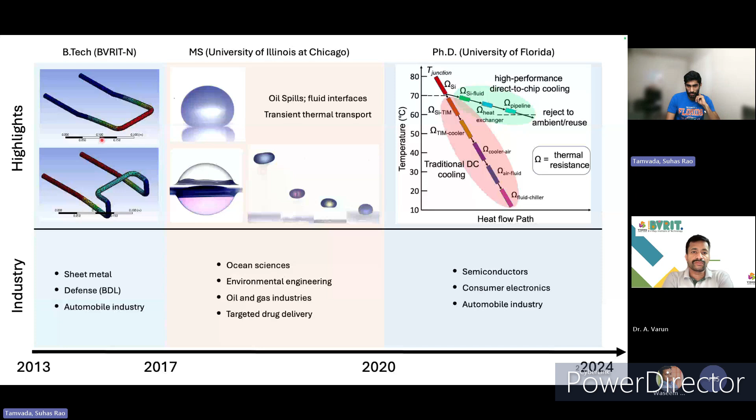Then I moved on to get my master's at University of Illinois Chicago, and I was really interested in fluid dynamics at that point in time.

I started taking one or two fluid courses, and what really interested me was the fundamental research going on there. What you see here is not a simulation; it's an actual oil drop sitting on top of a liquid surface.

If I play this again, essentially what's happening is when the oil drop is coalescing with the liquid surface, it's not happening in one step. It's taking multiple steps to coalesce with the surface because of capillary forces. The capillary surface tension forces acting on that oil drop are pinching away a certain volume of the drop. This is exactly what happens in oil spills.

Why is that relevant? Let's say you have an oil spill—I'll talk about this in more detail again. Most of the relevance for the research I did during my master's was related to ocean sciences and environmental engineering. ExxonMobil was very interested in the research I was doing, and I'll tell you a nice story about that. Beyond that, the pharmaceutical industry was also interested, since there's a lot of relevance to oil-water interactions in emulsions.

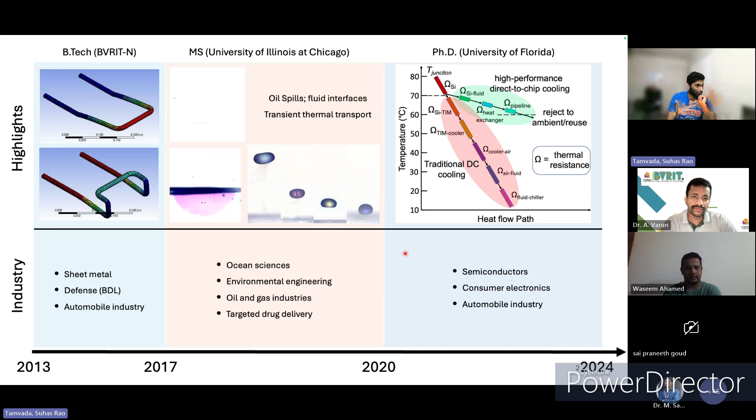Oh, that's a cool video I took. It's essentially a mix of an air bubble on top and a little bit of oil on bottom that's sort of bursting, and that became our icon for everything.

Anyway, like I was saying, a lot of internships and everything during BTech. This is a cool picture that I found from 2016.

No points for guessing who the driver was at that point in time on the go-kart. Very stylish driver, but we built our own go-kart. I think you might be, in certain teams.

The SAE Baja team is a very nice team to be on. I think this was a Greek name that we chose, basically a horse that was, if I'm not wrong, Alexander the Great's horse. I'm not too sure, but anyway - Alexander's horse, right? You're right, that was Alexander's horse's name. Yes, absolutely, so I remember we chose the name based on that. It was then, Bucephalus, I think. Yeah, that's exactly right. So that was a very nice experience for me.

Again, we built this from scratch. So think about everything that needs to go into this - we had to design our own things. I think at the end of it, at least two or three of us basically became experts in welding, because we could not weld at the start, but then we practiced and practiced and definitely became experts at welding these things, all the chassis components and all of that.

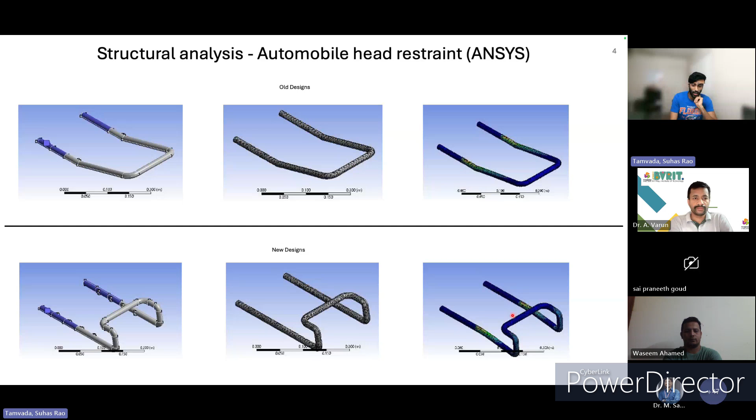So many industries have worked on this. And of course, I have some really outgoing memories from 2017. I think Murli Krishna sir, he was our class teacher at that point in time, and also head of department. We got some cake and printed out some T-shirts with all of our faces on there. For some reason I couldn't find a lot of other pictures, or maybe I was slightly lazy to go back to Google Photos, but definitely a lot of good memories, fond memories.

And then I started my master's at University of Illinois, Chicago. Somehow I was working with a team where there were a lot of Indians. This is Varun, he was a postdoc when I was there. He's now at Harvard, pursuing an academic career himself.

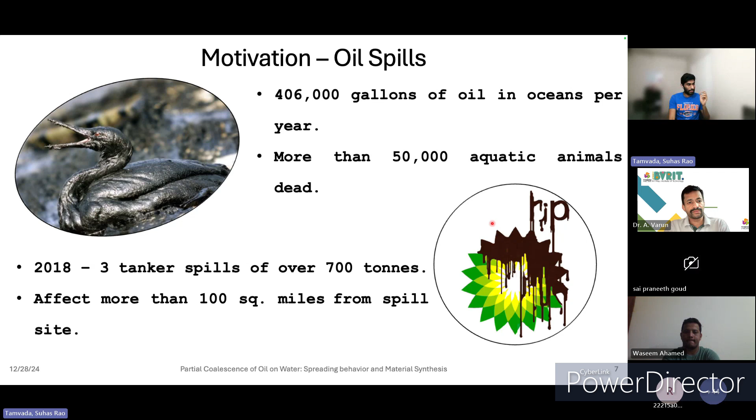The reason I wanted to put up this slide and the next one is to show you that as mechanical engineers, we are needed in many more fields than we think. Initially when I was doing my BTech, the reason I wanted to take up mechanical was I was interested in automobiles. I loved cars, things like that. I remember there were these Meccano or Lego sets that you used to build small equipment from - that's what I was interested in as a child. A little bit of aerospace too, but those are not the only fields.

Here's a story I promised I'd tell you: when the BP oil spill happened, mechanical engineers from Purdue were specially contracted by the US government and a national lab here called Sandia National Labs. They flew down immediately, assessed what was happening inside this oil spill, and mechanical engineers solved this problem, not anyone else. So mechanical engineers are needed in many more fields than you think.

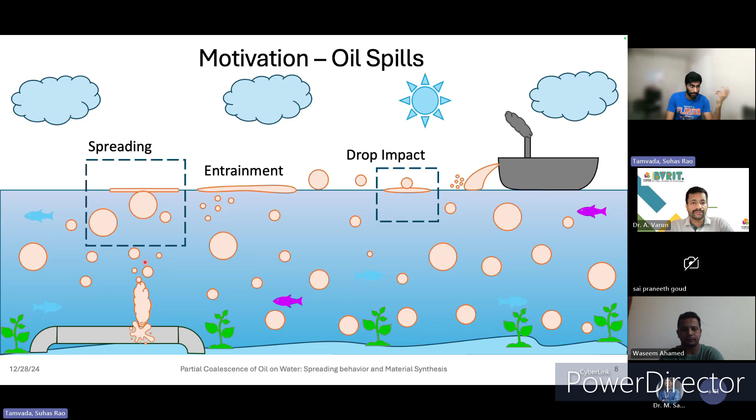So here what I was showing was if there's a tanker going, there could be oil spilled here, or if there's a pipeline burst somewhere under the ocean, that's also spilling. Essentially we were studying all of these processes, and what we wanted to study was how these oils actually spread on ocean surfaces. That tells us if these oils are spreading at a certain rate, then how can we employ mitigation strategies to solve and clean up these oil spills.

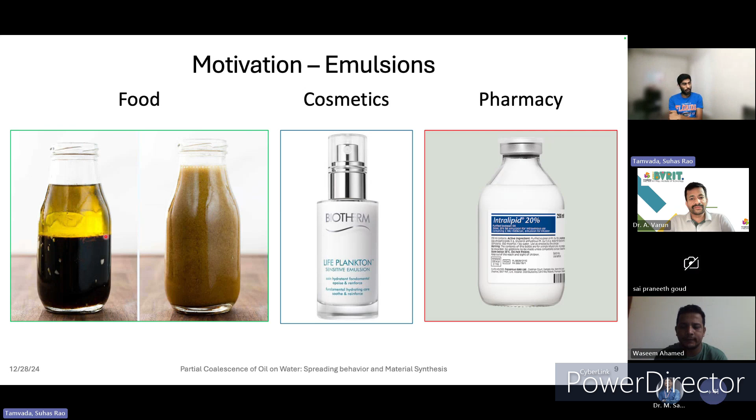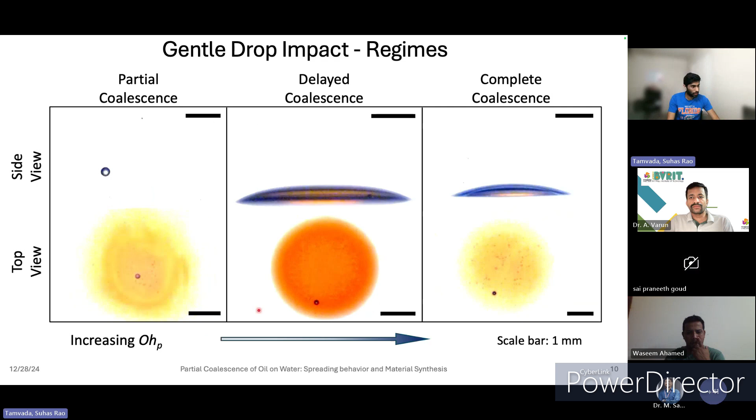These experiments are essentially governed by something called the Ohnesorge number. I don't want to get into too many details, but there are fundamental fluid dynamics numbers that govern these processes. We were studying how they spread, and we came up with these spreading laws based on experimental data points.

So I was studying this: there's an oil that spreads to a maximum, then recoils and comes back, and there's another oil that just spreads to a maximum diameter normally.

One thing that was really interesting for us as mechanical engineers—I kept thinking, how can I relate this back to fundamental mechanical engineering that we studied? What this looks like is essentially a spring mass damper model. The oil drop spreads very similar to a spring mass damper system: the mass of the drop is the mass of the weight you're using, the surface tension of the drop acts as the spring, pulling it back, and the viscosity acts as a damper.

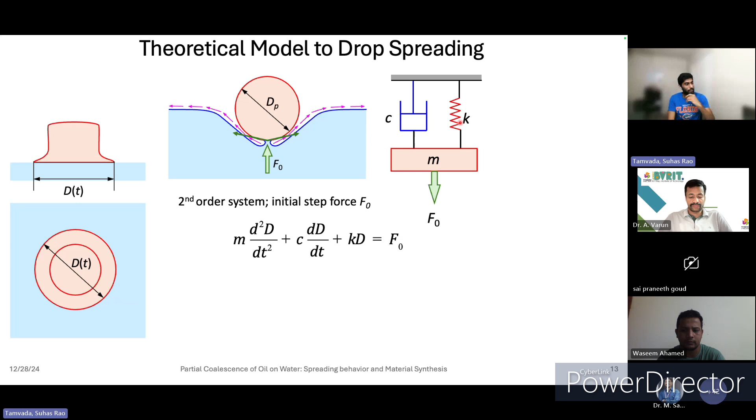You can use fundamental differential equations to model these—I won't go into details. I'll skip some of these slides from my thesis presentation, but we see that you can actually model all these oil spills as if they were spring mass damper models.

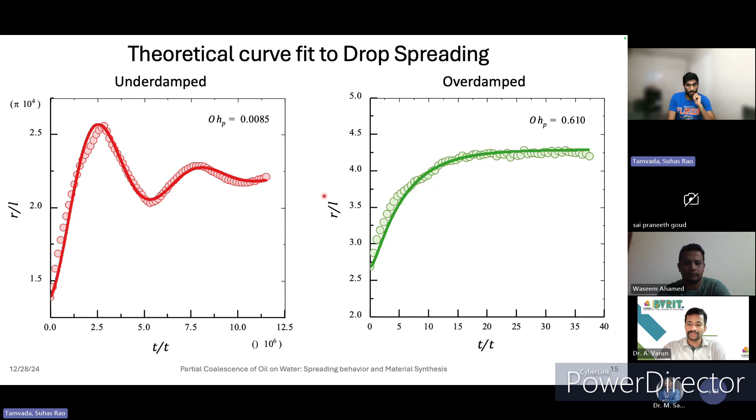My whole idea in showing all of this is that I never knew before joining this lab and working on these experiments that ocean engineering and environmental science actually require mechanical engineers on such intensive projects, where we have to go and solve these problems for a lot of industries.

I defended my thesis under my advisor, Professor Sushant Anand, and then switched gears to study a lot of heat transfer at the University of Florida. This was our lab again—it looks a little messy, but this was one of my experimental setups. I worked on quite a few projects there.

The other thing my PhD at University of Florida gave me was this: if you take any of your phones right now, they're completely filled with a lot of chipsets. How are these chipsets actually made? Companies like Apple, Samsung, or Google design these chipsets and send them out to something called foundries—companies like Global Foundries, or Taiwan Semiconductor Manufacturing.

Yeah, I think you're muted, Dr. Varun.

But basically TSMC and all these companies start manufacturing these chips, and I got to do all those processes inside the clean room—that's why I'm wearing all these suits, almost like wearing PPE kits during the pandemic. We have to do that because we cannot let even a small strand of hair affect the manufacturing process. So I was building these chipsets, and then performing thermal analysis on all of them.

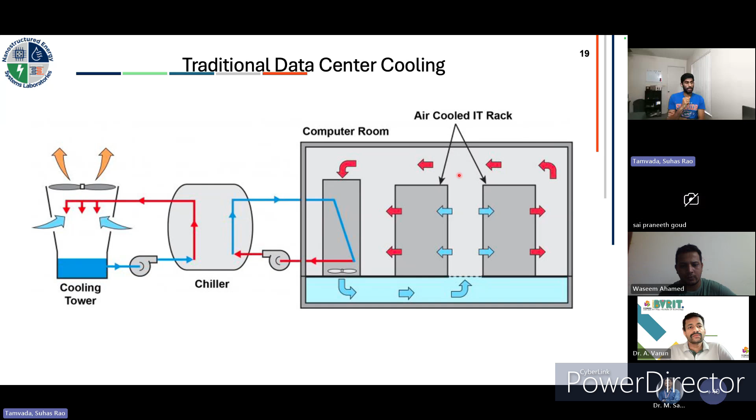And roughly, think about this. This is my favorite chart that I always use to pitch to investors and everyone. Roughly 50% of the energy flowing into a data center is used not to power the chips, but actually to keep the chips cool. So imagine how much opportunity we have as mechanical engineers to go and reduce this. Our goal essentially is to reduce it to roughly 2% of the entire energy usage inside a data center.

That gives a different kind of opportunity. I want to talk about research opportunities, but one thing I wanted to mention here was that through this entire process, I've also been exposed to a lot of entrepreneurial skills and opportunities. The technology I developed during my PhD, investors were actually interested in, and we had, and I think we still have, the opportunity to commercialize this technology and build our own startup.

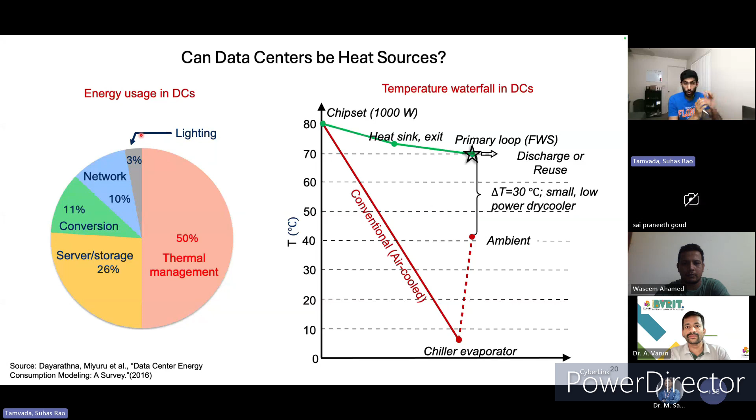So, how many of you want to start your own company, maybe after BTech or maybe after a little bit more formal training? Do you want to raise your hands? Or maybe some of you are already doing it on the side. Yeah, this is all great. At least 2 or 3 people. Okay, that's nice. 5 actually.

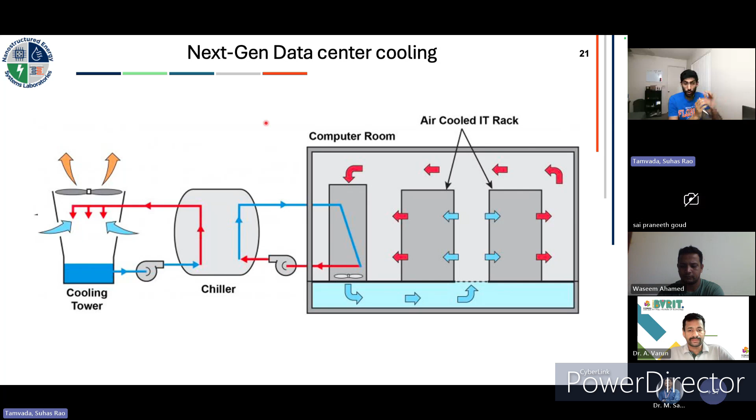Okay, that's good. This is great, because for me, this kind of exposure to pursue different paths is valuable. At this point in time, I could have chosen to become a professor and teach all these things. If that's what you're interested in, that's what you can choose. If you want to go into industry, you can choose that. Or if you want to start something of your own, if that's what really excites you, building products on your own is something you can pursue as well.

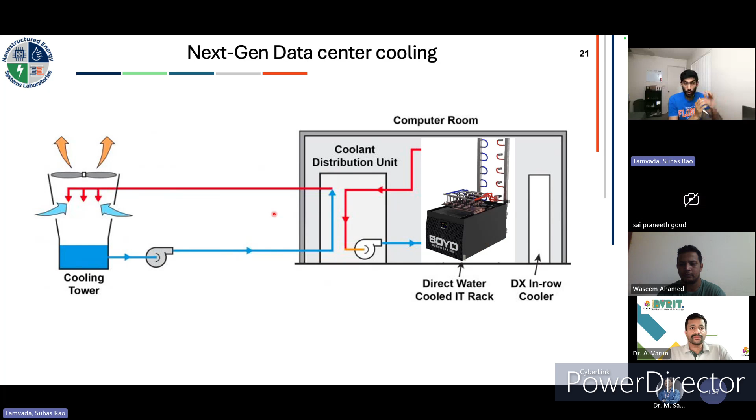What I was showing here was essentially that there are all these chiller units that can be eliminated if we essentially use liquid cooling inside these data centers. This is something you'll probably keep hearing about very soon. I don't want to go into all the technical details, but basically, a lot of mechanical engineering here as well, and biomedical engineering as well.

So can anybody point out one case of liquid cooling that you see in everyday life? One of the most powerful computers is actually liquid cooled without being air cooled. Does anybody want to take a guess at what it might be?

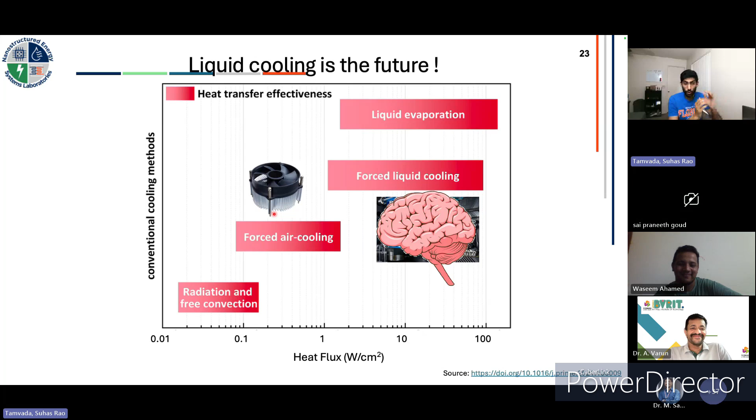So it's actually your brain. Your brain is doing millions and millions of computations, neurons and synapses every second, and essentially it's as good as or actually twice or thrice as powerful as an NVIDIA GPU, for example. But you're not putting huge amounts of fans or anything to cool it. You're just using your blood circulation to essentially cool it, and all that heat is being taken away through sweat and liquid evaporation. These are all cool things.

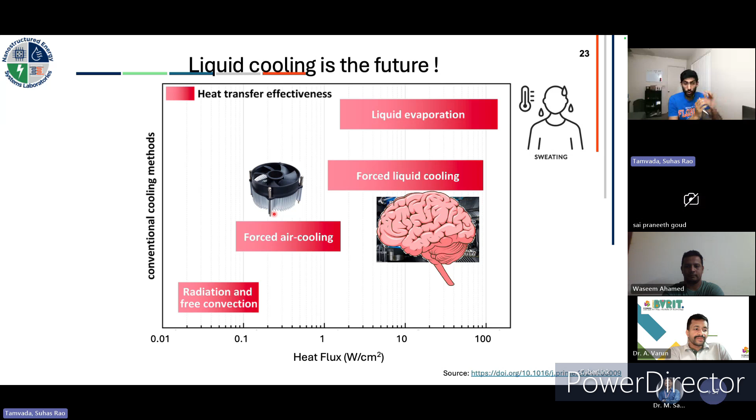So you may not realize that mechanical engineering, heat transfer, is there in many different fields. One of my friends that I showed you earlier started working on heat transfer in biomedical systems, essentially looking at how your body retains heat. So these are all industries where people could be involved as mechanical engineers.

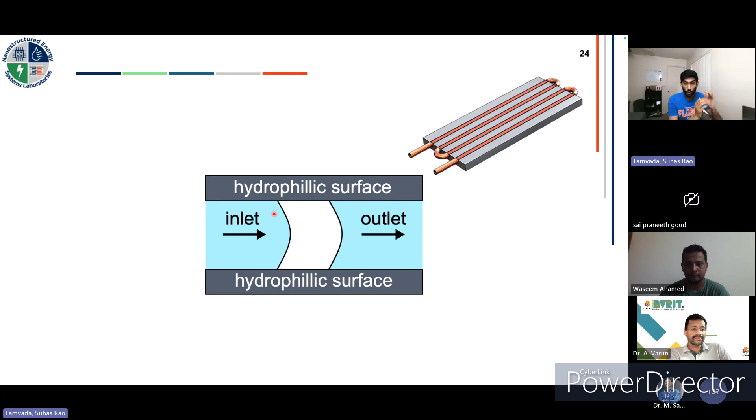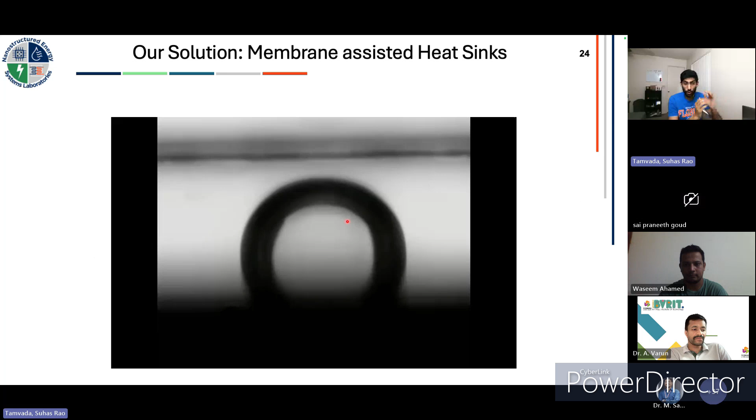Maybe I should really skip these parts and we can talk about other things in detail. But essentially, we were proposing a new sort of heat sink where instead of having a microchannel heat sink, you essentially have a membrane that removes vapor and all of that. I don't want to get into too many details—let me keep going quickly so we actually have some time to interact.

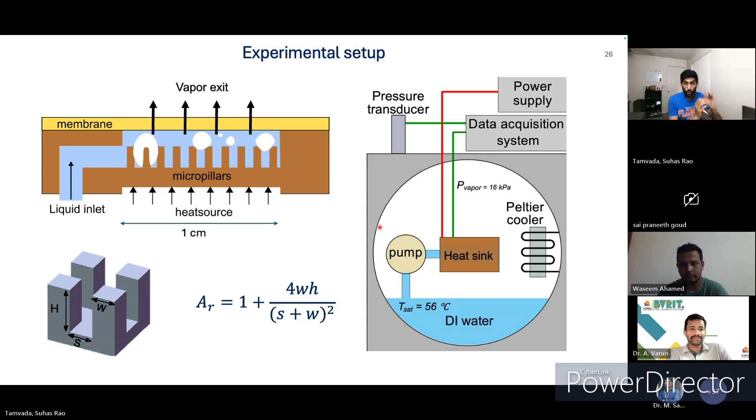We basically showed like 10x the performance, and the research opportunities are strong in the US. Fundamentally, there is. Sir, do you want to chime in, Waseem sir?

Suhas, I think your video is stuck. Your presentation is running, no problem, but your video, I think it's not moving along. Yeah, now it's okay. Okay, yeah, I think it's taking too much bandwidth.

Okay, great. One thing I wanted to mention here, I'm just talking about my own research, but the way US research essentially works is the government invests a lot of money into academic institutions rather than industry to develop fundamental insights into what will become technology, let's say 5 years from now or so. And that essentially gives us a lot of opportunity being inside a university to work on the cutting edge of things.

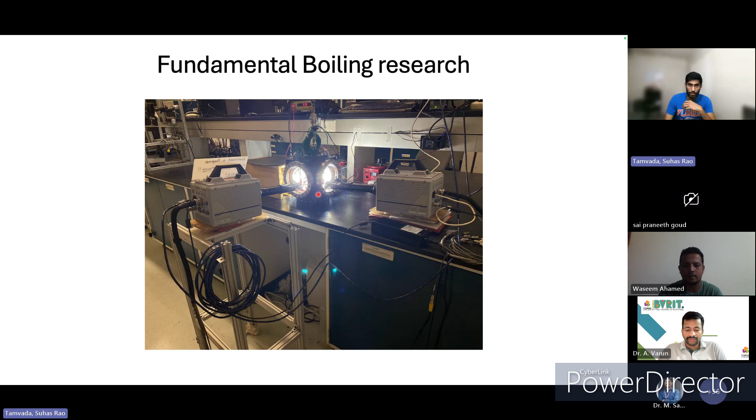Whatever we did will probably be used in the industry like 5 or 10 years down the line, and that is definitely an awesome opportunity to build things for the next generation essentially. Again, this was a lot of fundamental work—I don't want to get into the details unless you really want to dive into it.

This is what I was talking about in terms of nuclear reactors. We essentially showed that with a little bit of design changes inside your heaters, you can get roughly 4 times the amount of heat from a particular nuclear reactor. If you remember, I think it was 2011, there was a big nuclear disaster in Japan, the Fukushima nuclear plant. Essentially, the nuclear fuel rods started burning down and overheating. Sometimes what happens is the heat is so high that water cannot even come in contact with the nuclear fuel rod, and because that cannot happen, it just builds up and leads to catastrophic failure.

Something very simple—maybe it's dinner time in India, maybe you should try this. Just take a dosa pan, and everybody does this, right? If you're putting some dosas or rotis, put it on your gas stove and start heating it up. At some point, maybe just put one single drop of water and it will normally evaporate. But if you wait for a long time and let it heat up, maybe you should try this today—if you put a drop of water, it'll start dancing on top of that pan.

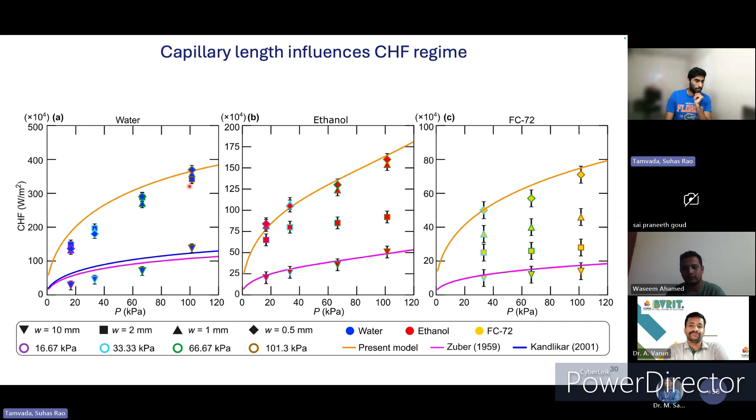And that is exactly what happens inside these nuclear power plants and everything. That's what we were trying to study, and we basically showed that you can essentially increase it.